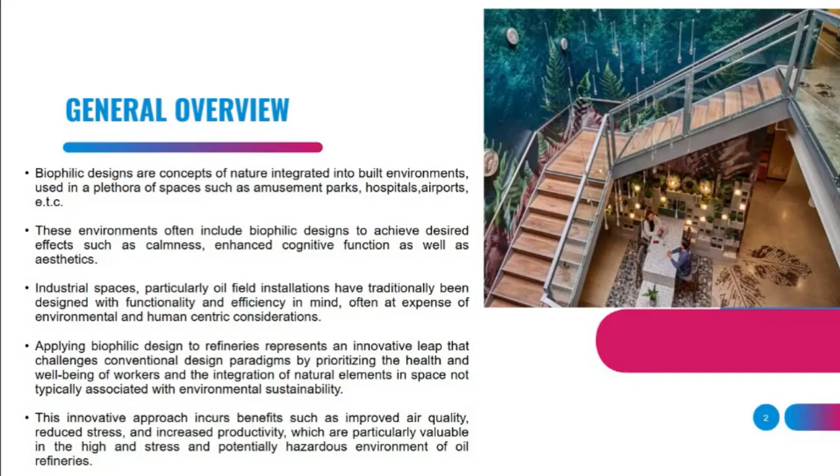So first of all, what are these biophilic designs? Biophilic designs are generally concepts of nature integrated into built environments, and they are used in spaces such as hospitals, schools, airports, homes, and hotels. These environments that include biophilic designs are used to achieve a desired effect, aside from creating or enhancing the aesthetics of the environment. They also bring effects such as enhanced cognitive functions, calmness, and reduced fatigue.

So incorporating these designs in industrial spaces is actually uncommon, and we want to fill that gap because we believe that applying biophilic designs into these spaces helps workers who are usually faced with repetitive and strenuous tasks to experience calming effects and enhanced cognitive functions, which is necessary in their work, and also helps the environment in a sustainable manner. Incorporating this into refineries, we are challenging traditional design paradigms by putting the health of these workers at the front line. This innovative approach helps us improve air quality and increase productivity by enhancing their cognitive functions, and it's particularly valuable in potentially hazardous environments such as oil field installations.

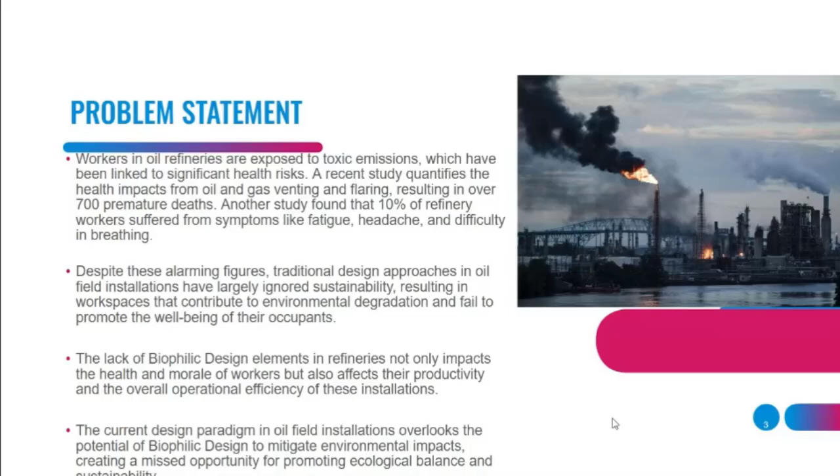We could incorporate biophilic designs, which is a way of bringing organic architecture into the oil patch, increasing the health and morale of workers so they see a reason to come to work happy, not just for the salary. This design will also help mitigate environmental impacts and create a good ecological balance and sustainability effect. Then for our objectives...

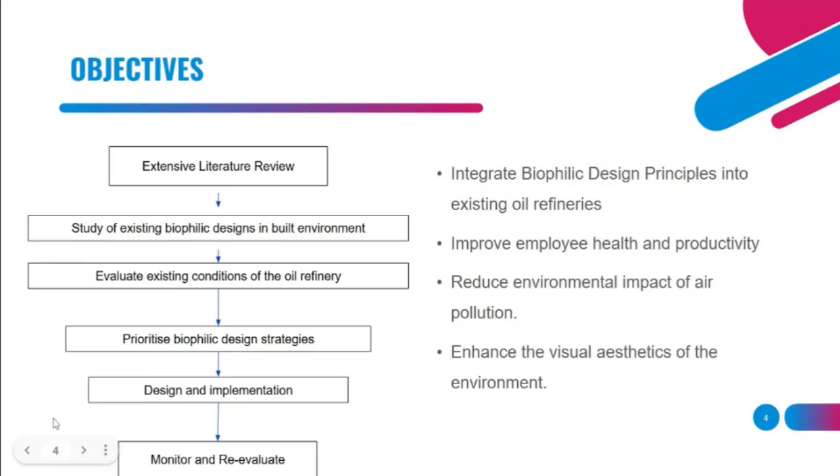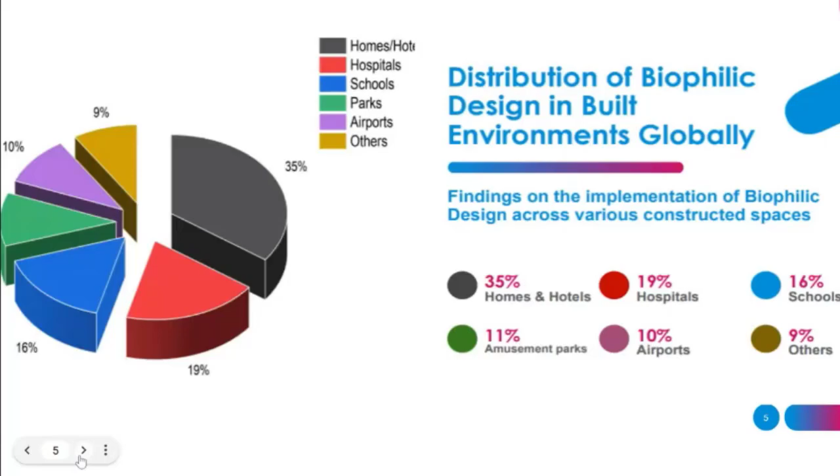According to the research we've done, we've seen that biophilic designs are built mostly into homes, hotels, hospitals, schools, amusement parks, airports, and offices, but they haven't actually been implemented in facilities like industrial facilities. This is the gap we hope to fill. You can see the pie charts showing an uneven distribution of the integration of biophilic designs into these already built spaces. So my partner is going to take us through this integration and why we are going to integrate this into oil field installations. Naya?

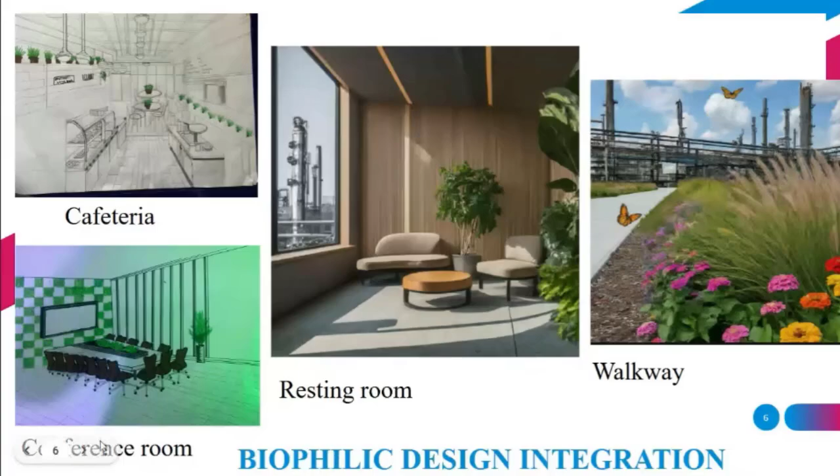So I'll take it from there, and we have the key beneficiary of this research, which are the employees, by helping them in their health and enhancing their cognitive functions. Also, this will be enhancing the environment.

Companies who want to maintain their environmental reputation wouldn't want to be seen as people that destroy the ecosystems. So this also will be beneficial to them and also to the community in that environment, by making them inclusive, to bring the indigenous plants to help us enhance the greenery of both the indoor and the outdoor spaces.

Our relevant sustainable development goals—our research resonates with 4 major SDGs, which are sustainable development goals 3, 11, 13, and 15. Number 3 is talking on good health and well-being, which are very crucial to the workers working there. It also enhances sustainable cities and communities, encourages climate action, and encourages life, which also encourages biodiversity.

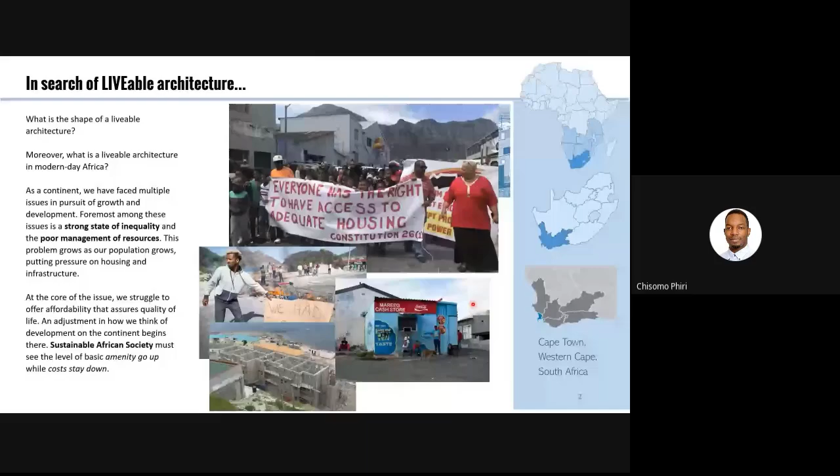And whilst this is a deep problem that's got deep-rooted effects, I believe there is also an opportunity for a new direction, especially when we talk about sustainable African societies, and South Africa as part of that sustainable African society. The idea is simply to find ways of implementing these sustainable systems to increase basic amenities whilst keeping costs low. As you can see, the area of Hangberg, the area of Hout Bay in general, is an extremely diverse area.

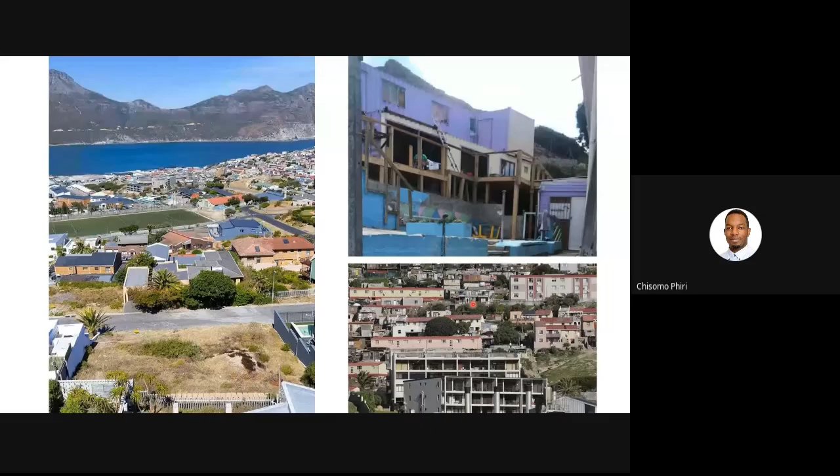There is a huge disparity between the areas that are low income and areas that are affluent, as you can see in this image of Seaview and Hangberg, which are neighboring districts. The issues endemic with inequality revolve around differences in engagement levels, difference in inclusion. There's a level of difficulty in accessing health and security. Integration is extremely difficult if you are starting off in different areas and at different levels of accessibility, and there is a lower willingness to invest in an area that has these issues.

We need to look at a shift from a shallow ecology, where man is above the environment and there is a reliance on technical solutions and the management of the environment as an administrative task. Instead, we need to look at a deep ecology, where man is part of the environment and has veneration for life, all life, and attempts to achieve a complete symbiosis.

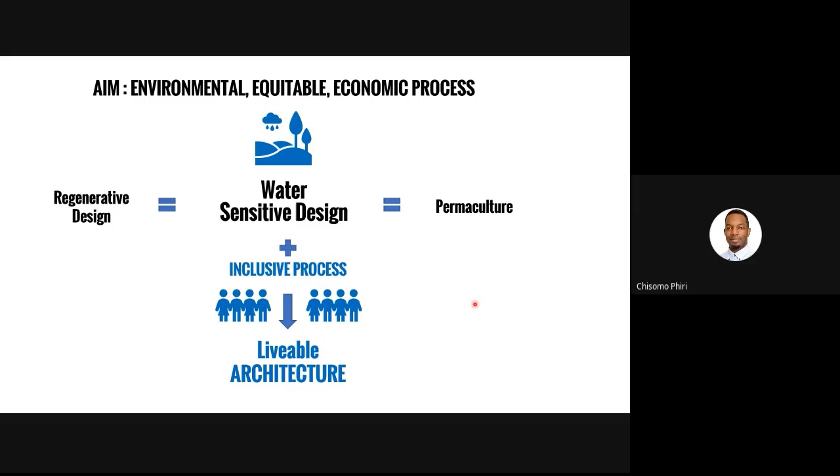With that aim in mind, toward an environmental, equitable economic process, I managed to identify water-sensitive design as part of permaculture, part of regenerative design, but with the addition of inclusive processes we can achieve a more livable architecture, a livable approach to architecture. This is a diagram where I look theoretically at how livable architecture would sit within this framework.

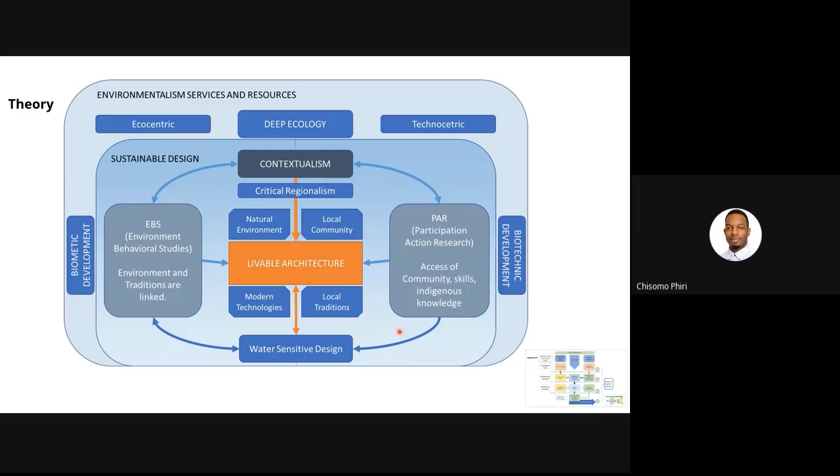Fantastic. As you can see, this is a diagram where I look at the theory involved in identifying where livable architecture sits. It is an aspect of sustainable design, something I imagine is easily connected to water-sensitive design, environmental behavioral studies, and participation action research. But it sits at the junction of all of these elements while being critical to the region, and speaking to the natural environment, local community, modern technologies, and local traditions.

The approach I took, the methodology adopted, was to look at four steps towards a livable architecture where water-sensitive design is a key driver. To get to that point, I looked at understanding the performance targets present in media and literature reviews. I looked at investigative tools such as baseline investigations and data gathering, at independent variables, and then dependent variables, which were community engagement and expert engagements.

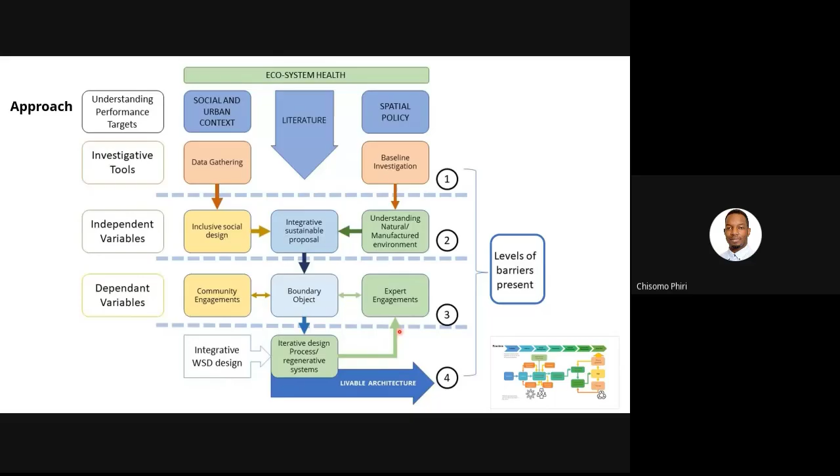That took the form of a redefinition of practice, looking at how you move from initiation to closeout traditionally versus how you can move into initiation, viability, and iterative design development, using community engagement to reframe how to approach design. I also looked at how that could lead to a circular economy, and how you can get into use, reuse, and phasing upward of design.

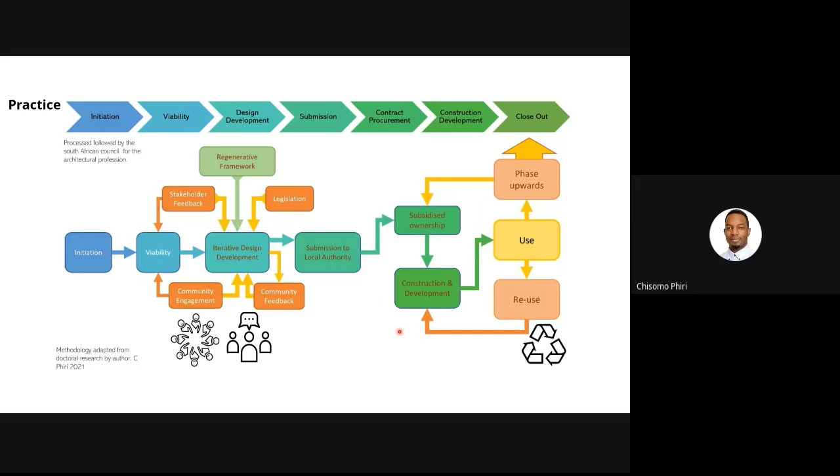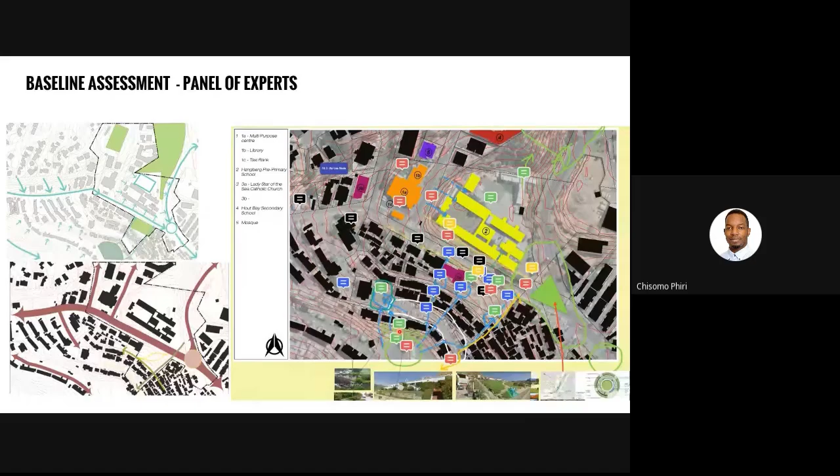I managed to get a panel of experts together, and there was a discussion over the different elements of the area that could benefit from water-sensitive design, as well as identifying areas that were important and areas that could be linked to intervention.

I then engaged with residents and members of the area, not necessarily the whole community. Together we managed to create a revised diagram that looked at all the different levels of engagement with the area, taking this shape, where we looked at layers of information, security, and fire.

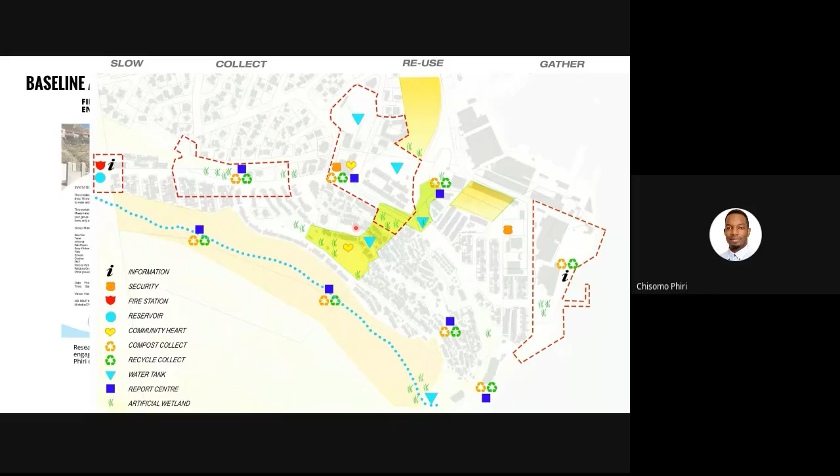We looked at the possibility of implementing fire stations and how that could be received. We looked at opportunities for reservoirs and community, identified where the community would center its activities, and then looked at recycling methods, water retention methods, and possibilities for artificial wetlands in the area.

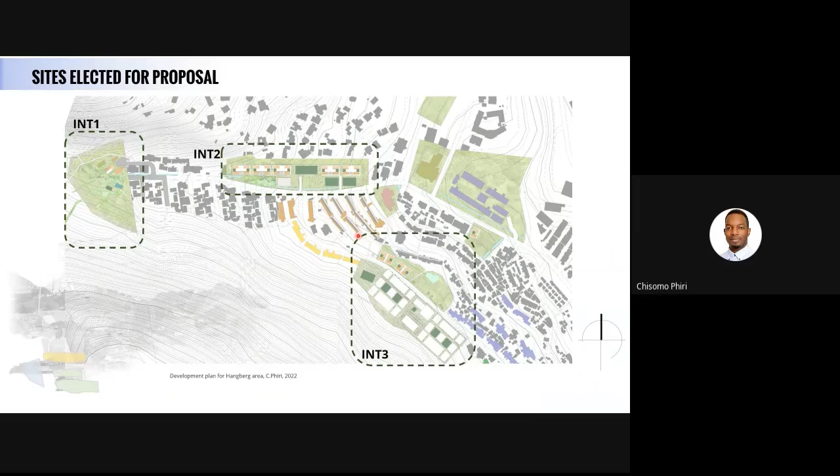That resolved itself into a series of proposals, which I named Intervention 1, 2, and 3. Intervention 1 is a complex system that connects to the environment as a threshold intervention.

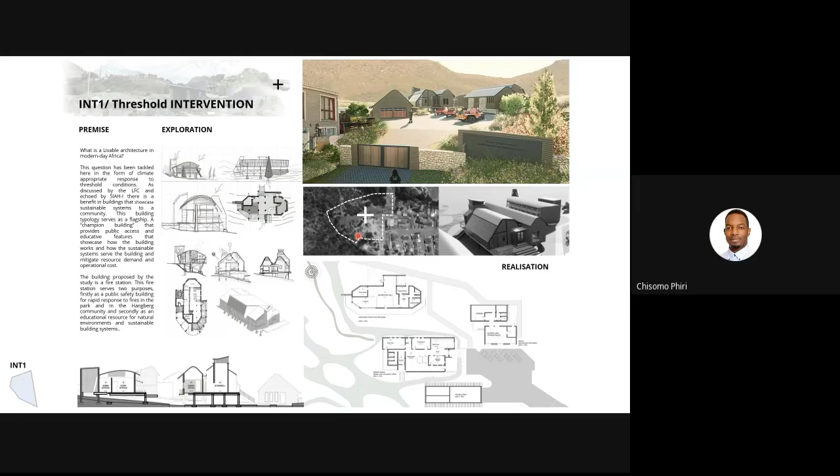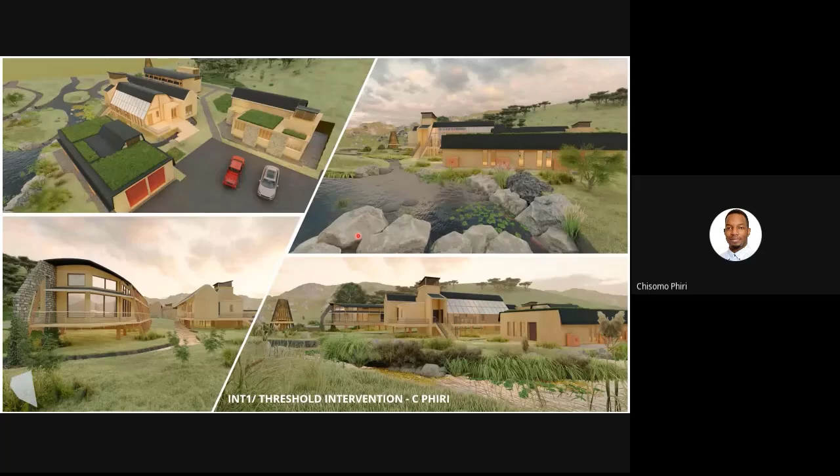This threshold intervention has an information center, a satellite fire station, and systems that work with a dormitory to allow for training as well. This was designed as a building that would touch lightly on the environment and integrate sustainable systems and sustainable materials, so you can consider this a flagship for the project. I'd imagine this as something rolled out as phase one.

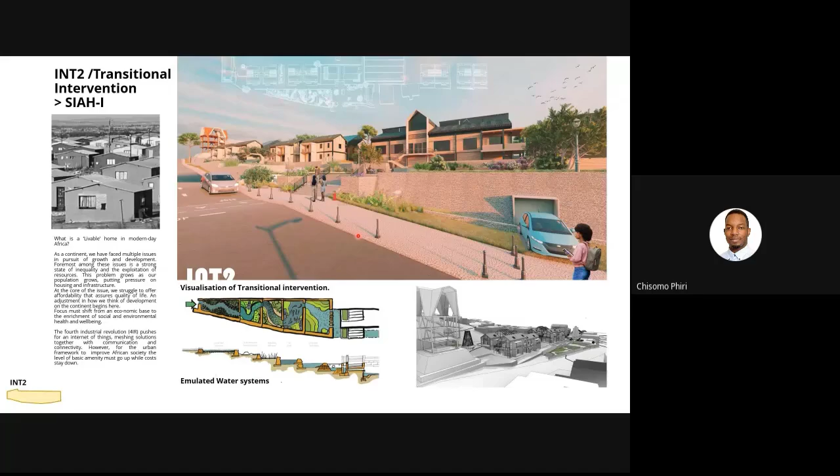And then we would move into phase 2, where there would be transitional interventions, allowing for people to move into these buildings that would be phased up. These are called the SIAH-I livable units. Those units, identified in yellow here in this diagram, would have a series of levels that can be integrated and can be developed depending on the use of the family that's involved.

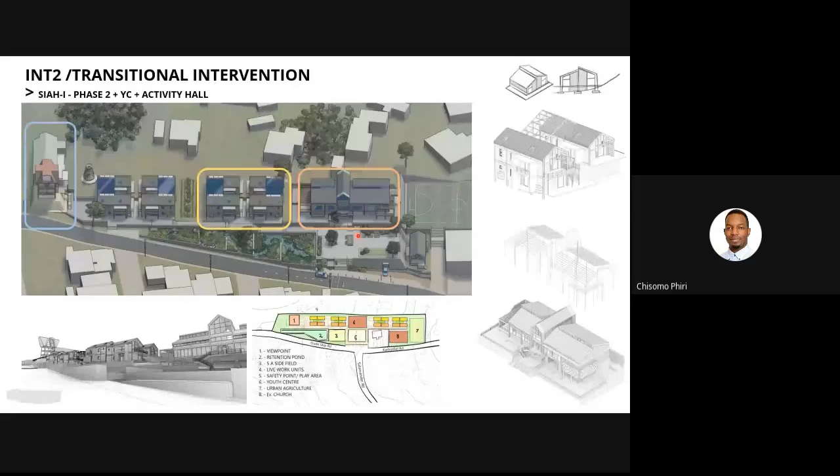This district was also allowed for an activity hall and a youth center. These were programs that were identified by the community as things that they needed, things that they would imagine would benefit the area, as well as a police station with an observation tower that also acted as a green agricultural intervention. And the SIAH-I livable units have 3 phases, as you can see here.

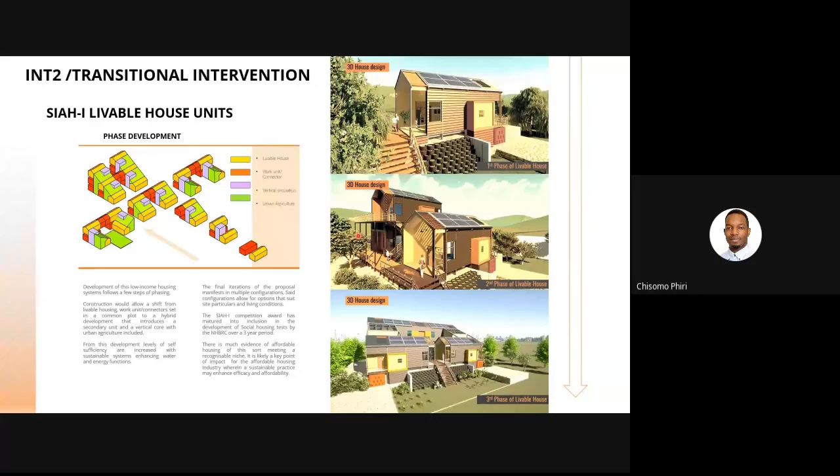These are the systems that were in use, where we quantified the amount of water retention as well as the water administration, how much savings could be calculated in one unit, and then how that could be carried forward.

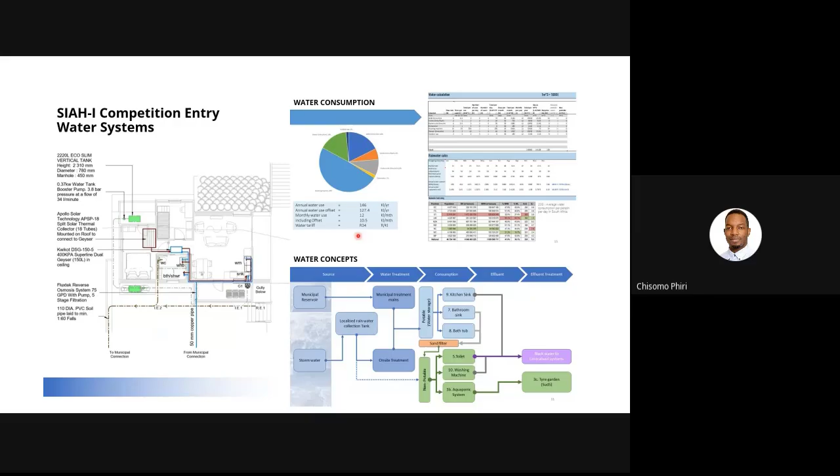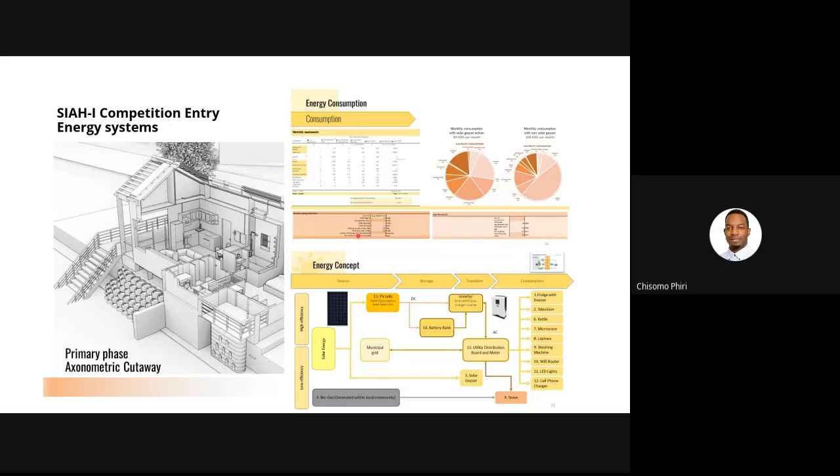The same was done for energy, where savings were identified in terms of using a solar geyser as opposed to not using one, using a centralized system so that you don't have to rely on the power systems that are present. And then, of course, there was identifying public buildings as sources of energy for the entire district.

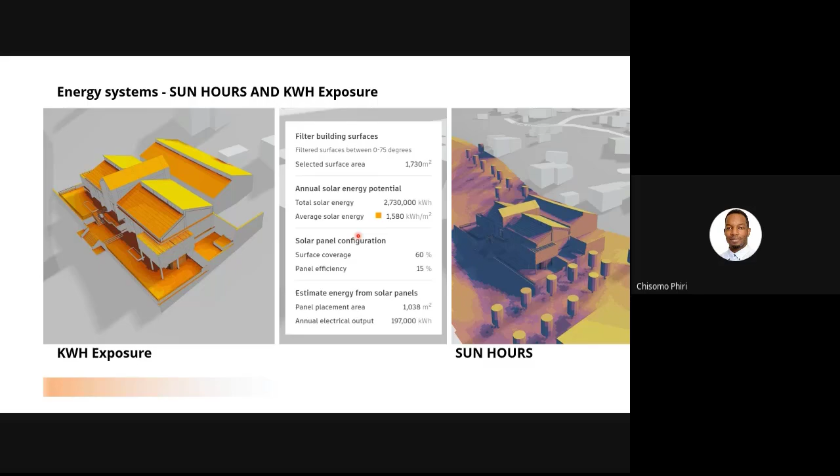This is an analysis of the sun hours and the kilowatt hours of exposure present on the youth center building, which would then start to act as a power generator for that area. And then that got taken to the next level, which is intervention 3.

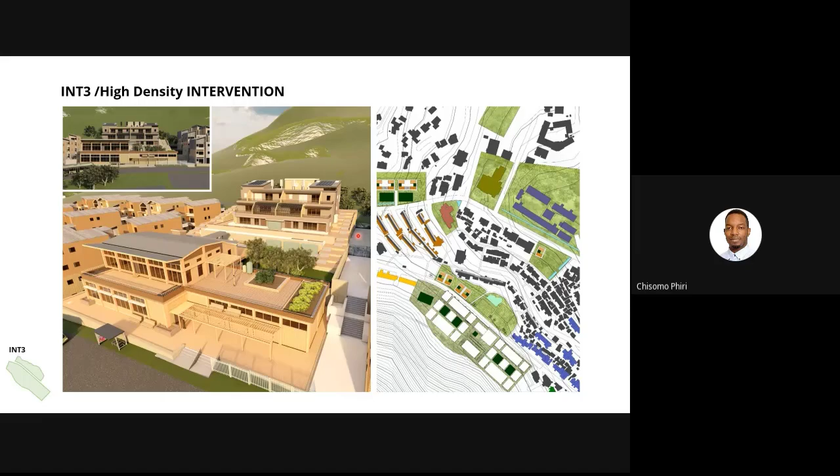In intervention 3, we looked at maximizing the area and developing high densities, trying to ensure that the highest amount of people could benefit from generation and water treatment. These are diagrams that describe how that would be achieved in the mixed-use central system, which is this building over here. And you can see it here in section.

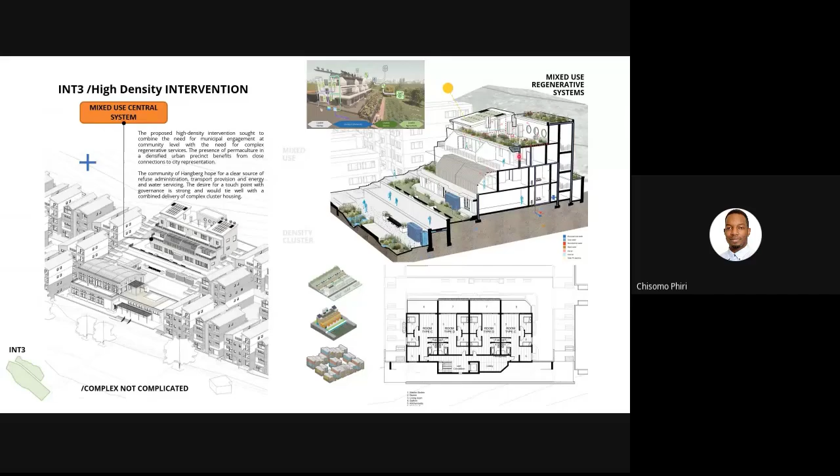That was then communicated into the community hall, which was more focused on how we can use technologies creatively, using low-embodied carbon materials like timber, low-intensity brick, as well as passive heating and passive cooling, and decentralized water treatment, which would be situated in a centralized water system there.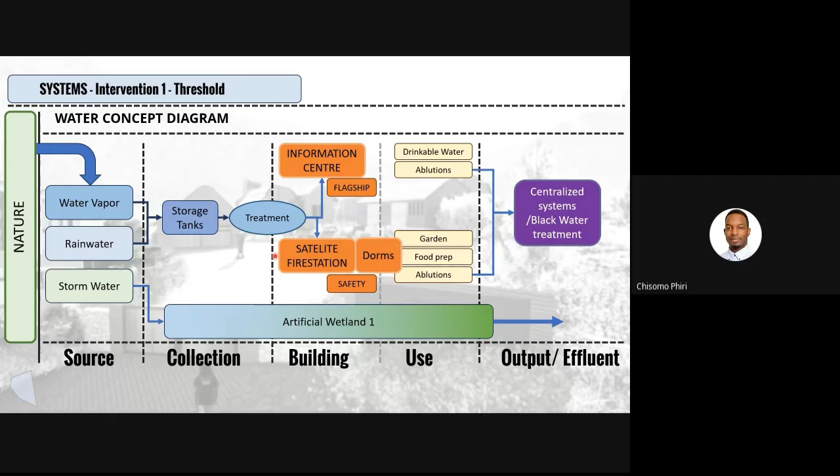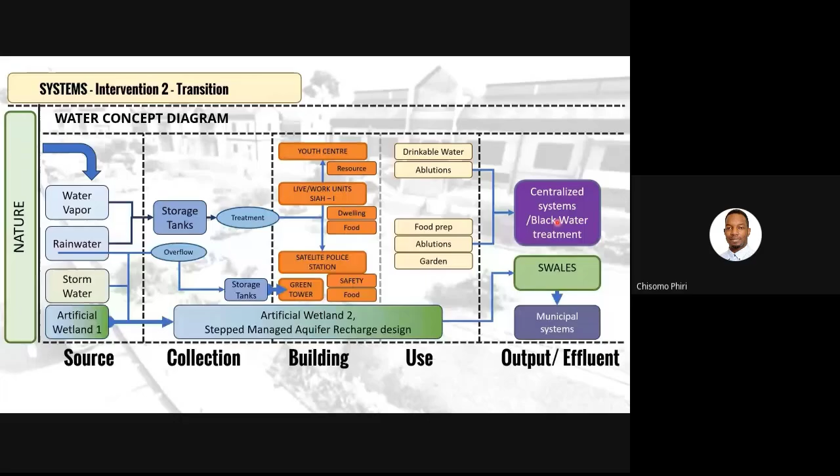Then, of course, I've got water concept diagrams that talk about how these intervention systems would work cohesively from source, collection, building utilization, and then output effluent. These systems would connect to one another and would then eventually find their way back into the natural environment after being treated and naturally run through a series of systems of aquifers and swales.

And this is how all of that comes together.

In conclusion, these became the key findings: there are 2 sets of barriers in the way of implementation of water-sensitive design in low-income areas. The first set of barriers was established systems, of course, the convention. We rely on established systems.

Financial barriers are present. Not many people understand how to financially motivate such a program. There are social precepts of this system being expensive, being impractical, because of the amount of change and innovation that would have to take place. And of course, there's technical operation barriers and existing policy that seem to be in the way.

However, that perception is the core of barrier set number 2, which is a perceived cost of construction, perceived cost of conversion, and a perceived difficulty in adoption, when in truth, once implemented, these systems could then start to feed into a rolling forward of improvisation and innovation.

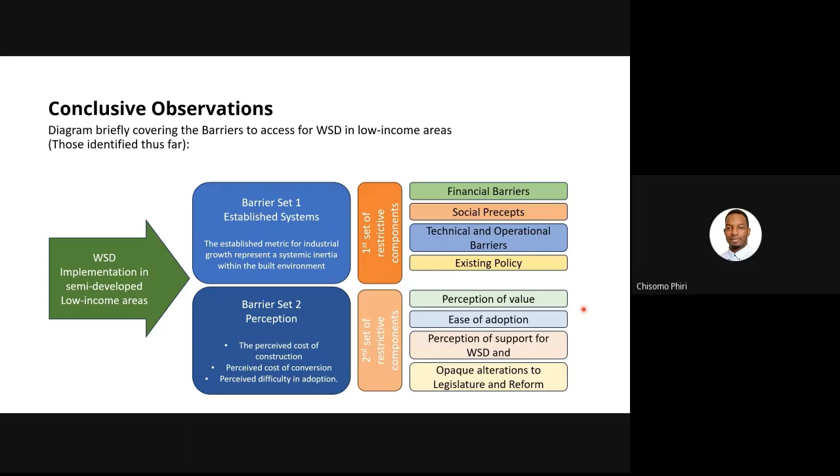So in totality, the research found that there are some barriers present, and for us to get to a water-sensitive, livable environment, we would need to overcome these barriers and find a way to engage in sustainable practices whilst addressing these issues for people to buy in and accept the changes. Thank you.

Great. Amazing presentation, Chisomo. Well done. Well done. Well done. This is an amazing solution that could benefit our environment, and is hitching on the United Nations Sustainable Development Goals, which is critical to us, right, as World Technology Partner. That beautiful presentation right there.

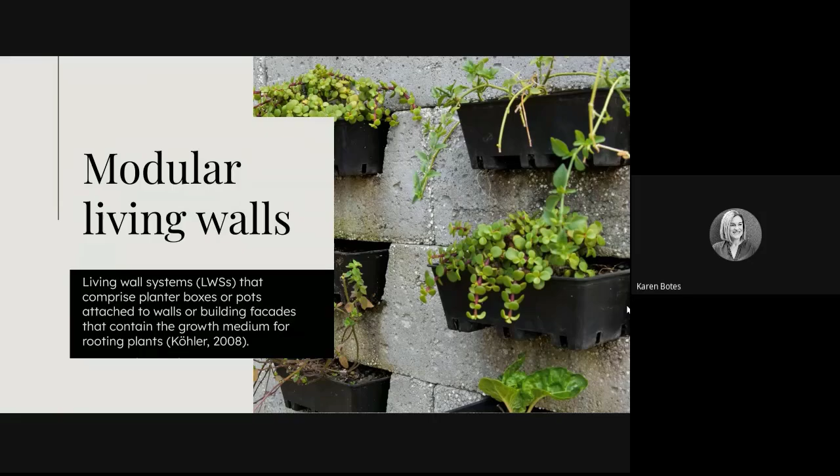First I need to clarify two definitions. The first is modular living wall systems - these are living wall systems that comprise planter boxes or pots attached to walls or building facades that contain the growth medium for rooting plants. And African vegetables are green leafy vegetables that are naturalized and adapted to Africa or selected for their local conditions.

So the SDGs I looked into was food security mainly, but we cannot look at food security in isolation, so climate action impacts on food security. Over the last 2 decades, the global climate has changed in such a way that it's affected all of our lives. Climate change impacts the prospects of achieving all 17 of the SDGs, either directly or indirectly, and especially food security. There's a link between food security and no poverty, and also responsible consumption and production, proved by research. I also explored good health and well-being, gender equality, decent work and economic growth, sustainable cities and communities, and life on land, to have a two-way link between ending hunger and reducing food insecurity.

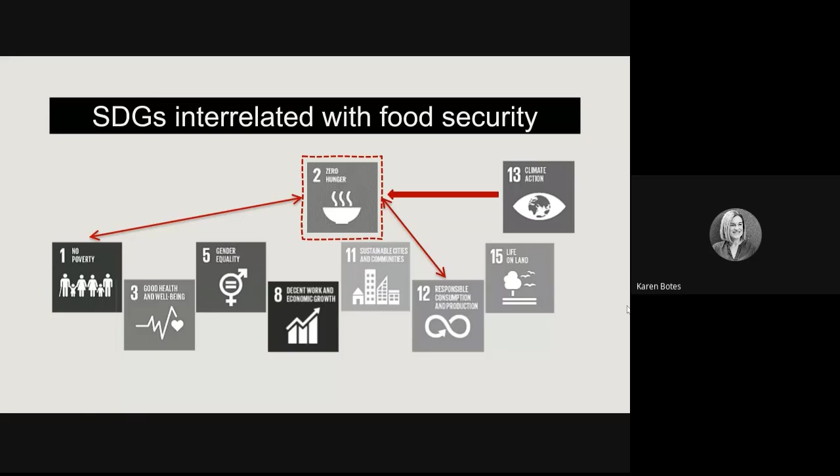Due to increasing atmospheric carbon dioxide levels over the last years, we experience extreme climate events with substantial economic losses for most global economies, and the changing climate conditions impact food supply and productivity. Especially in Africa, climate change has a devastating impact on food security, and this contributes to growing food insecurity and poverty.

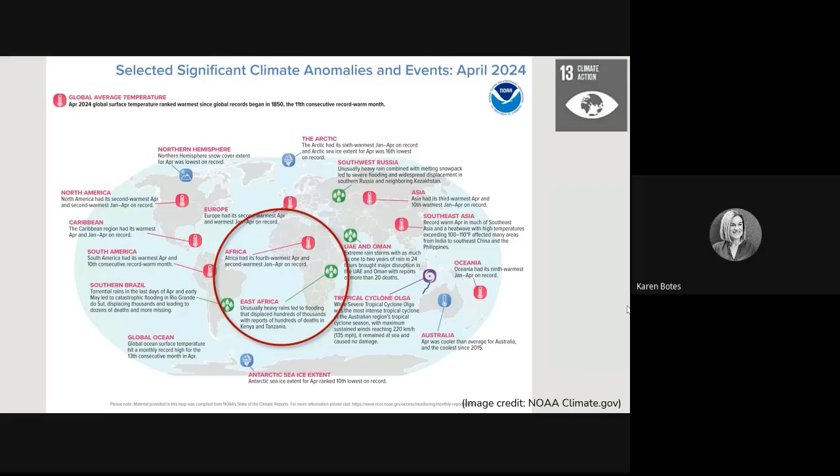Looking at the South African population, there was a 1% increase from 2023, with the population currently standing at 62 million people. The Gauteng province dominates internal migration, with more than 2.4 million international migrants from the SADC region. Approximately 55.5% of the South African population is living in poverty, with a total of 25% experiencing food poverty. These issues intensify food insecurity and the related SDGs.

My research focus areas were, number one, the contribution of urban small-scale food production to household food security and interrelated SDGs; two, the performance of outdoor modular living wall systems as edible green infrastructure; and three, the performance of African vegetable crops in modular living wall systems for household food security.

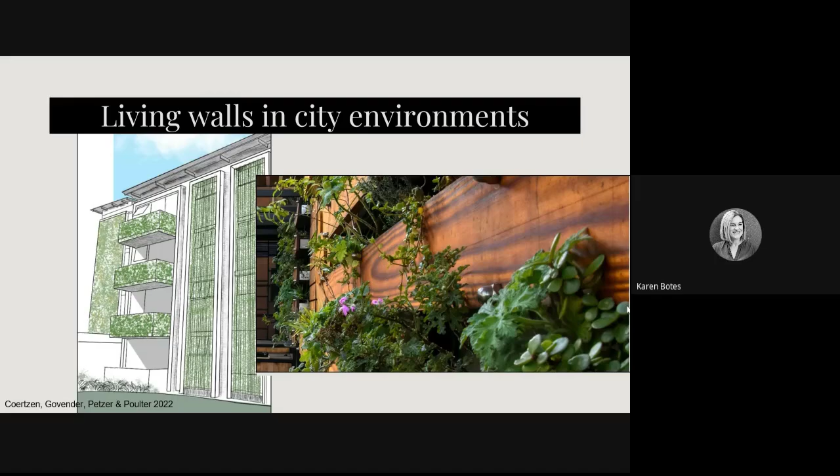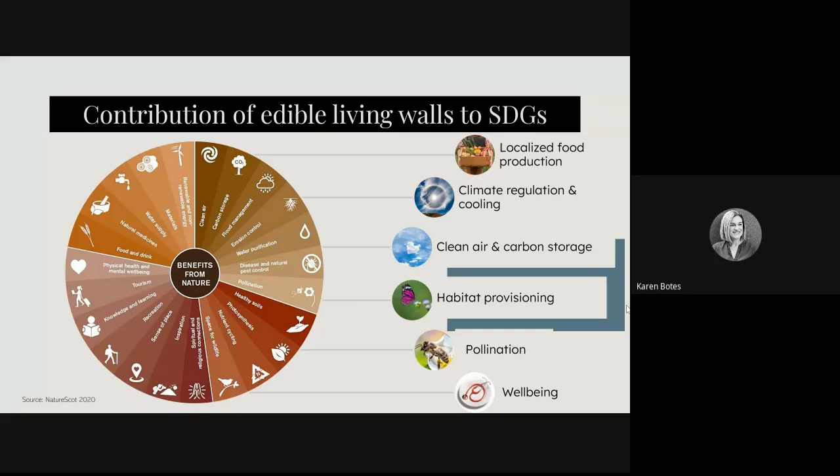Looking at focus area 1, food security and related SDGs: in inner cities, the potential area for facade greenery is almost double the footprint of buildings. That's why I looked at living walls. Living walls offer ecosystem services which are vital to sustainable cities. If we incorporate small-scale food production in living walls, we can address food security, cooling, reduce carbon dioxide, provide habitats, and benefit our health and well-being.

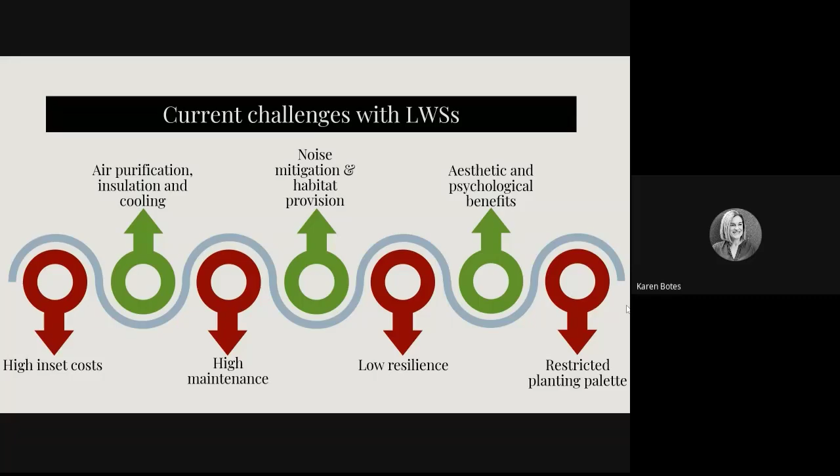Then looking at focus area 2, the living wall performance - current challenges with living walls show high initial costs, and maintenance requirements outweigh their benefits in total. They are not resilient, with a restricted planting palette to survive the stresses of an urban environment. So my study involved the construction of 2 selected systems. The first system, on the left-hand side of your screen, is the vicinity system, and it presents a high technology system.

The second system on the right-hand side, the eco-green wall, is a low technology system. The control was a natural soil area in which the crops were planted in a conventional agricultural convention.

Then area number 3, African vegetables. The global system relies on only 30 crops now for the nutritional requirements of the human population. This makes our food systems very vulnerable to climate variability, especially in developing economies like sub-Saharan Africa. So the human population will be more vulnerable if one of these crop species falters due to climate change.

One of these strategies entail the reinvigoration of African vegetables to improve diets and their sustainable use. Due to time constraints I'm not going to go into all of these, but the study monitored 9 African vegetable crops over a period of 6 months between 2020 and 2021.

I looked at various variables. I compared the biomass and plant stress for the different typologies and the crops. My other variables include minimum and maximum daily temperatures, relative humidity, precipitation, soil temperature, water content, and electrical conductivity. And then I analyzed the data statistically.

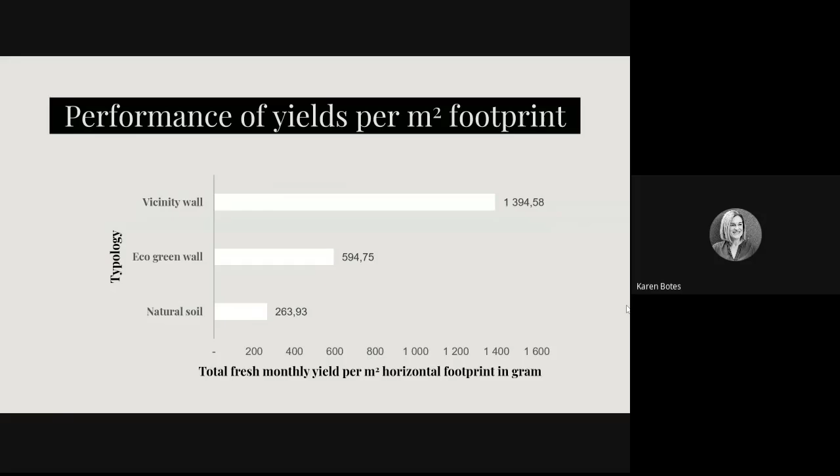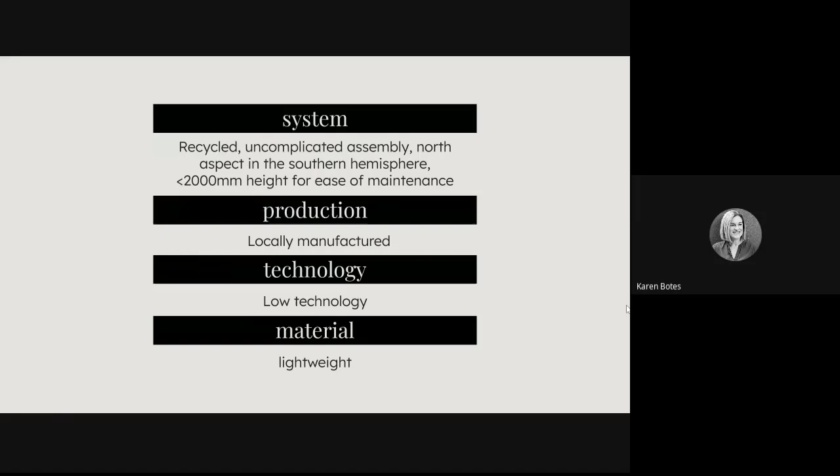Then looking at the performance of living wall systems: the system has to have components manufactured from cost-effective recycled or reused materials. It must preferably be locally manufactured. It must be a low technology system with uncomplicated assembly with robust components, and materials must be lightweight.

Also, the study proposes plant pots with a soil volume of at least 3 liters and a depth of 200 millimeters. This is important because it increases the yield and reduces the plant stress. Selecting suitable crops increases the crop performance, resilience and social benefits. The soil must also be suitable for the crop requirements.

Then a basic drip irrigation system must be provided for each plant level. This contributes to reduced costs and carbon footprint. And lastly, the system design should avoid open reservoirs and filters to reduce maintenance.

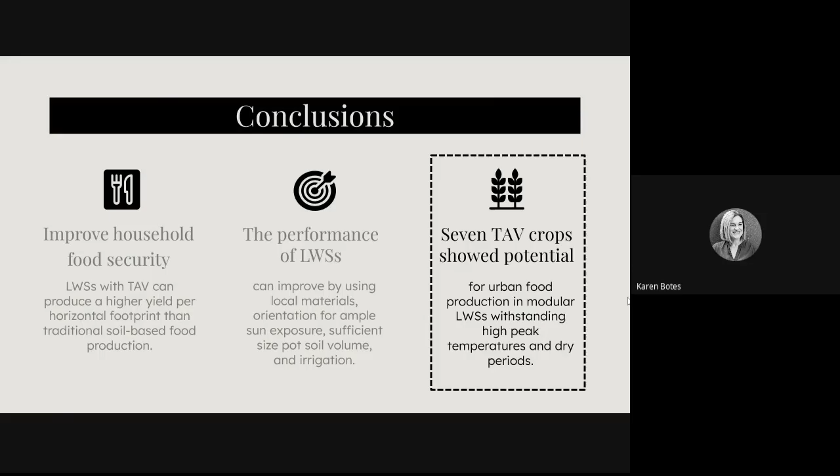Then 7 of the African crops that I looked at showed potential. Due to time constraints, I'm just going to flash through them quickly. Otherwise, I will exceed my 10 minutes.

Thank you very much.

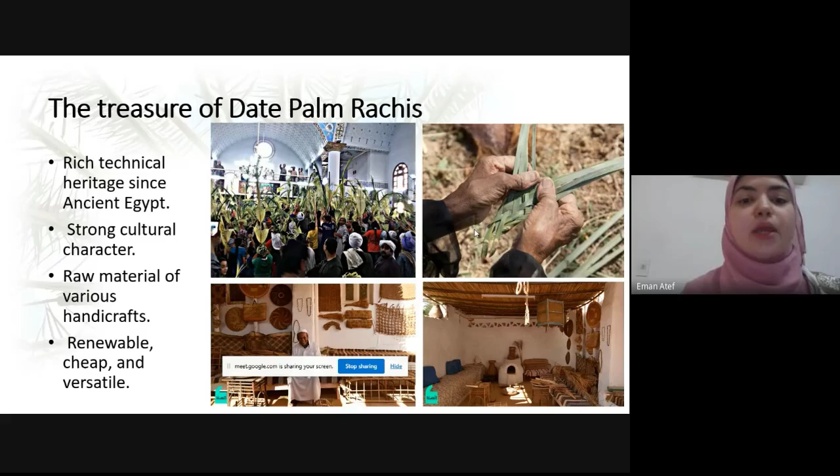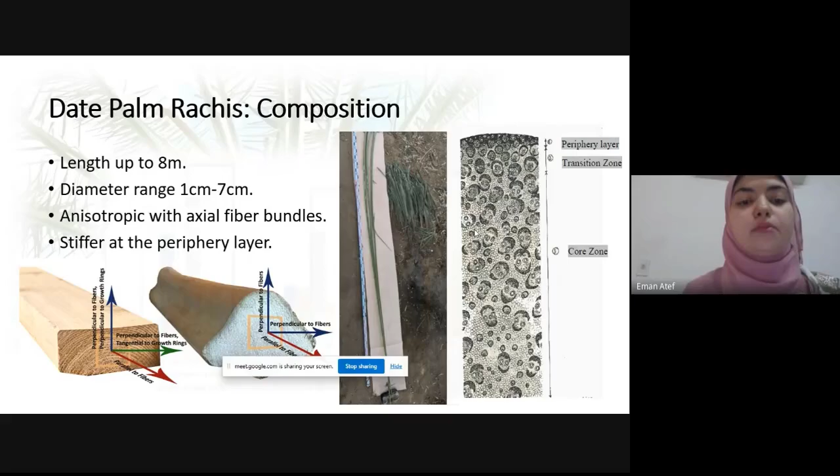Now let's look more closely at rachis. Rachis is the long rib flowing along a palm leaf with a length up to 8 meters and a diameter range from 1 to 7 centimeters. Fiber bundles extend along the rachis without much interlinkage in between, and the bundles are the densest on the outside, which explains why rachis is traditionally used without peeling to preserve its strength. The fibers being the sole medium to channel the forces makes the strength in the longitudinal direction far superior to that in the perpendicular direction. This is the main issue we must consider in any design concept that uses rachis.

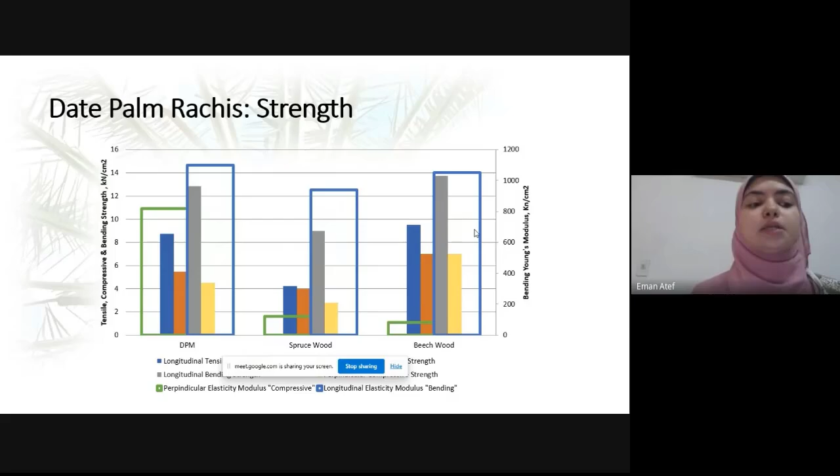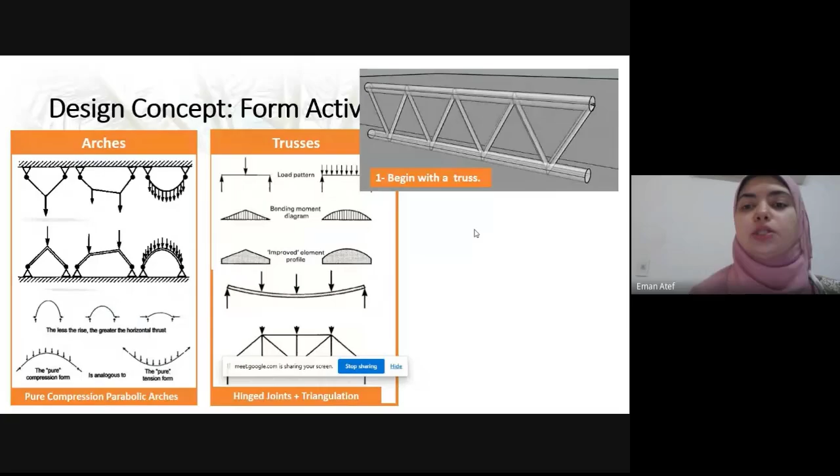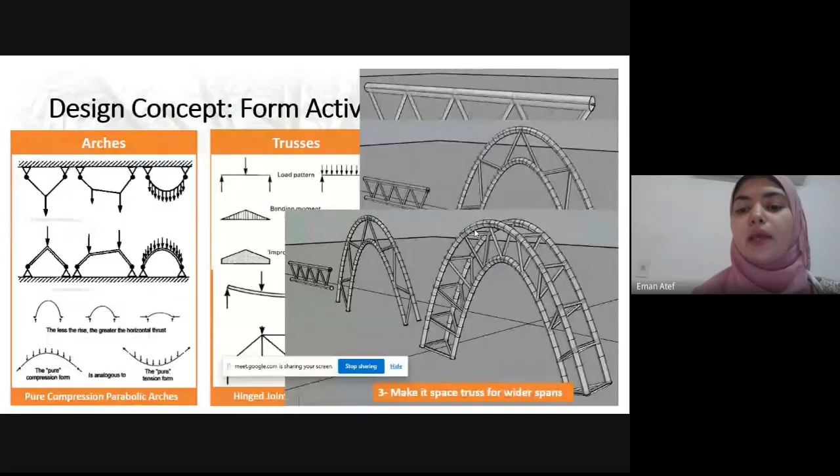So we'll need to look for a structural component that has the ability to transform all moments to axial stresses, so the fibers can carry them efficiently without failure. Such components include trusses, which use hinge joints and bracings to eliminate moments. Moreover, shaping an arch to be parabolic transforms all stresses on it to pure axial compression. So we thought, what if we begin with a truss and then arch it into a parabolic truss, so everything on it is axial compression. Then make it into a space truss to have higher strength and wider spans. Then shorten the bracings at the top for higher stiffness and lengthen the bracings at the base for higher out-of-plane stability. So this was our first concept, the tri-arch space truss.

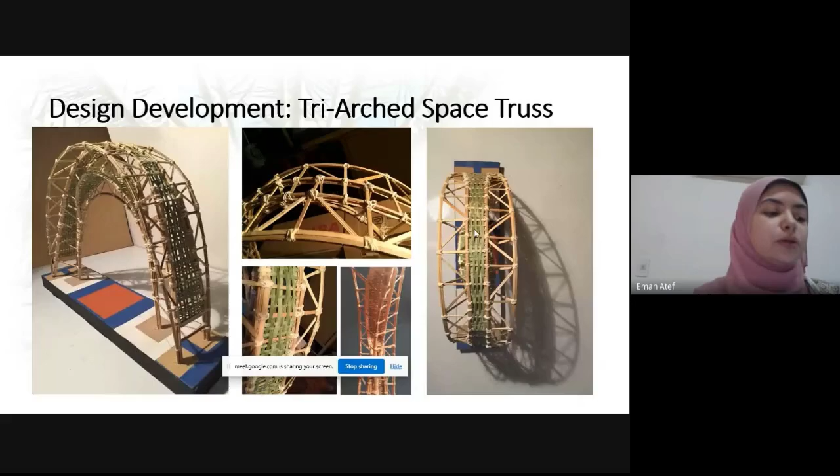This is a maquette we built using date palm rachis cut to scale, so we could understand the scale of the elements to use in bigger laboratory specimens. This was building these specimens, at a scale of 1:3, with a span of 2.8 meters.

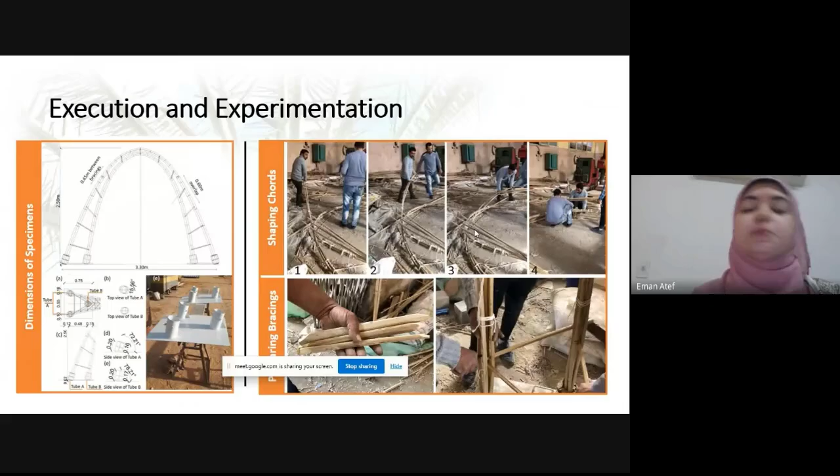The specimens were built by local craftsmen who enriched the design details with their expertise from the traditional handicrafts they deal with every day. These were our three specimens, and each was built in under a day, reusing members from the previous ones, because failures were exclusive to the top parts. So every time, the top parts were simply replaced, and voila, this is the new specimen.

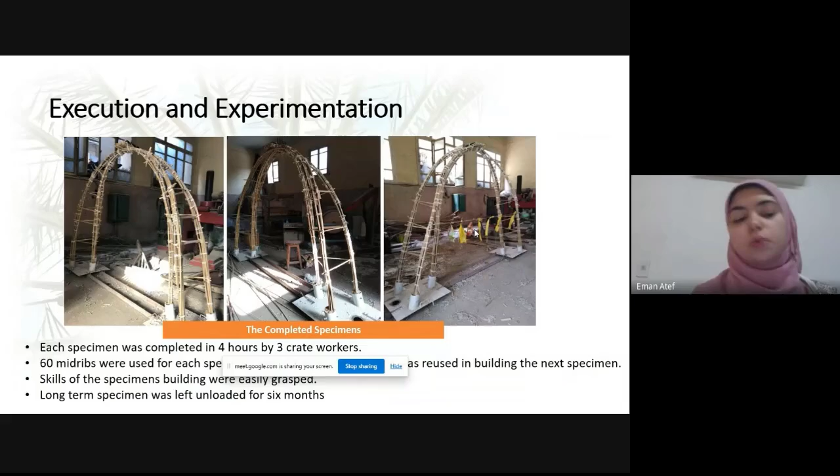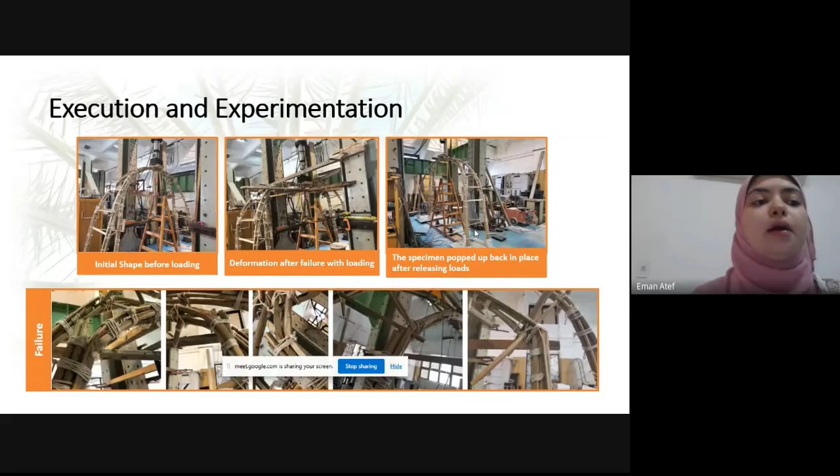In the laboratory, they showed high flexibility and safe failures. Failures were marked when we began to hear tiny cracks in the top parts, and the models popped back up after releasing the loads. The experimental behavior was compared and used to validate the digital finite element method model, and this was then used to predict the performance at a span of 12 meters, proving to be safe.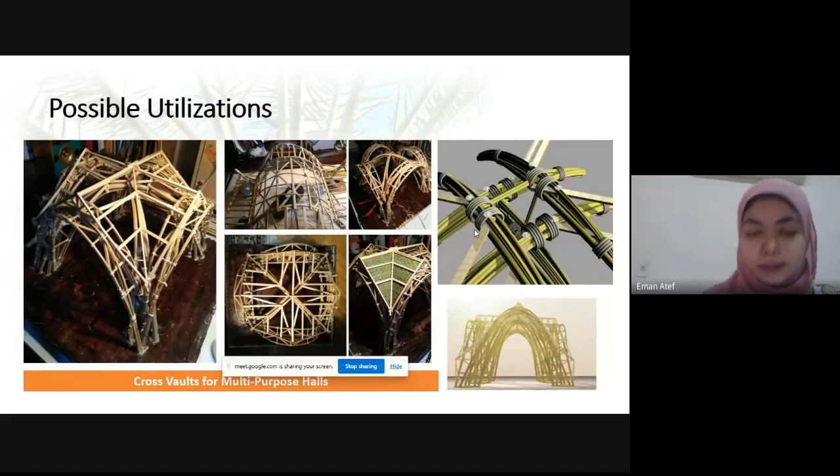This was my PhD, actually, but I found problems implementing them to build at the one-to-one scale, because they're monolithic structures that must be built one-to-one to actually investigate their performance. So we said, why not shift to a smaller assembled unit, something that employs the concept of prefabrication? And actually, prefabrication is not too far off from traditional practice.

Traditional handmade furniture, like those on the left, or the fences and huts in the middle and right, are traditional fences made in Upper Egypt and the oases of Upper Egypt, and they are all made by assembling separate lattices. Each lattice is made separately, and then they are assembled to make the whole product.

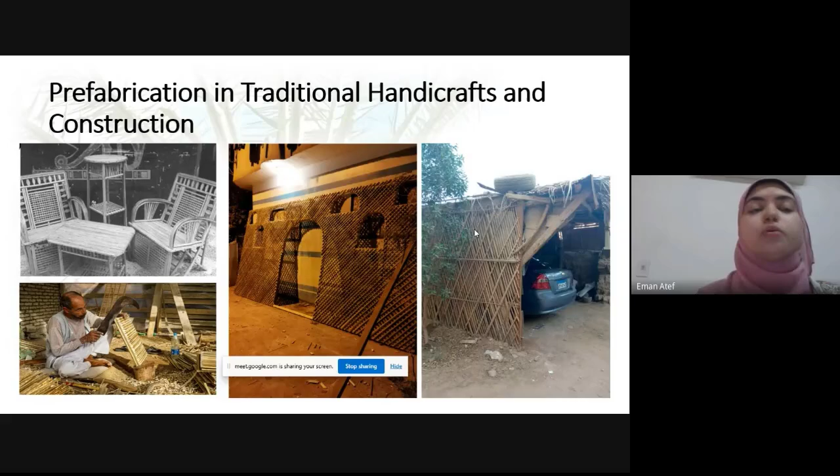So currently, I thought about using the details of the traditional handicrafts and employing them in a new design, a prefabricated wall panel that can be made, moved, and assembled to make a shelter or a house or whatever. So the details of the wall were inspired by details from traditional furniture. And as we said previously, rachis is...

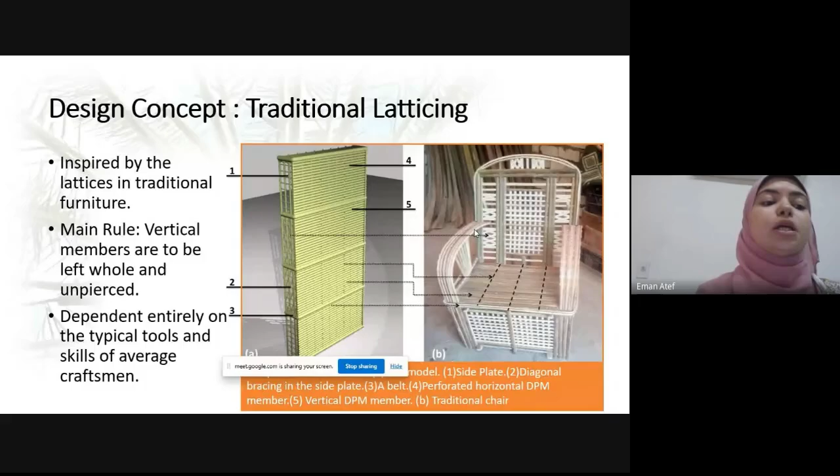...panel to carry these loads. So the longitudinal, vertical members must be left intact without any piercings, without any damage to the fibrous structure. But they can be driven through piercings in the secondary horizontal members, as we see here.

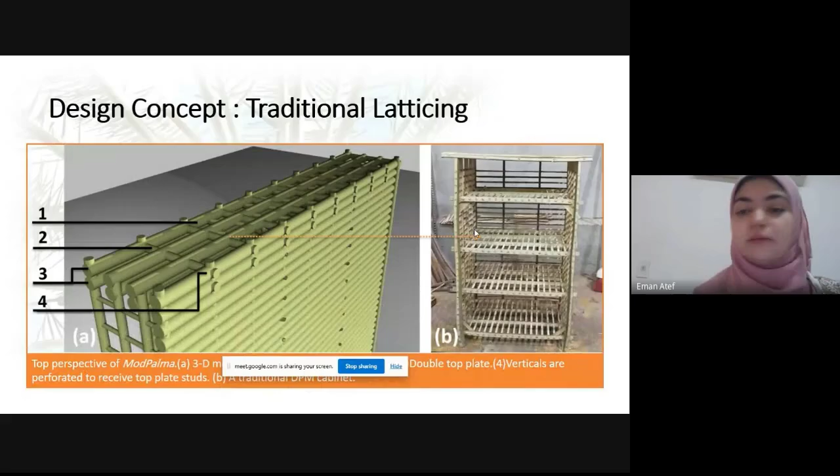And at the top of the panel, the top plate was duplicated to distribute the loads more evenly, also inspired by a shoe rack made of palm branches, shown on the right. At the core of the panel, additional vertical and horizontal frames and diagonal bracings were added to enhance stability and shear resistance, a detail inspired by beds made of date palm branches.

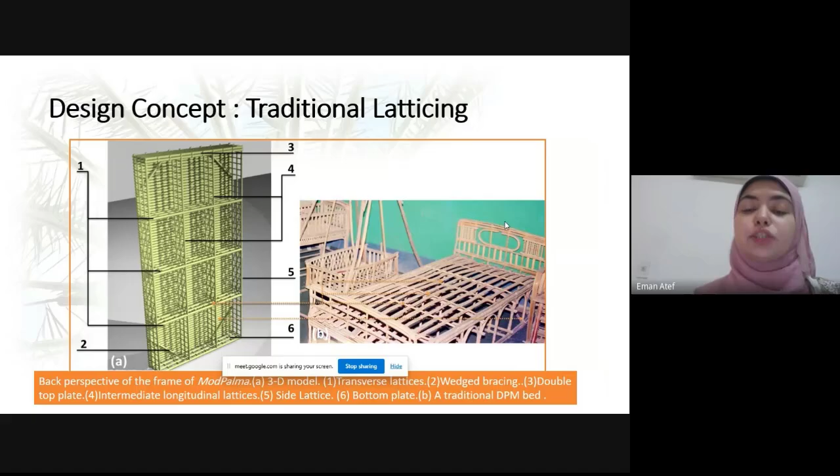Even the illiterate craftsman, through his nature, understood how he must fight the shear and create shear resistance, and this is what we learned from him.

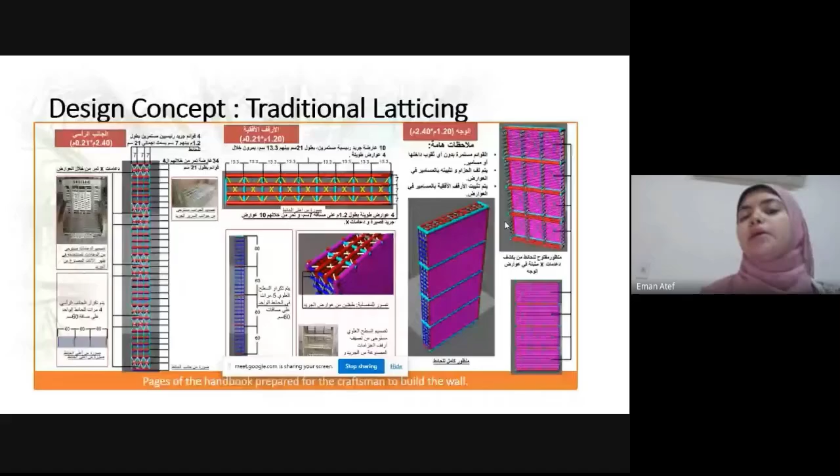And this was a detailed handbook I made to guide the craftsman through building the panels, written in Arabic, of course, by linking the details to the daily work they deal with in traditional furniture, fences, or other traditional crafts. These are details of the first real-scale panel.

Which shows the interlinkage between the outer faces and the internal frames.

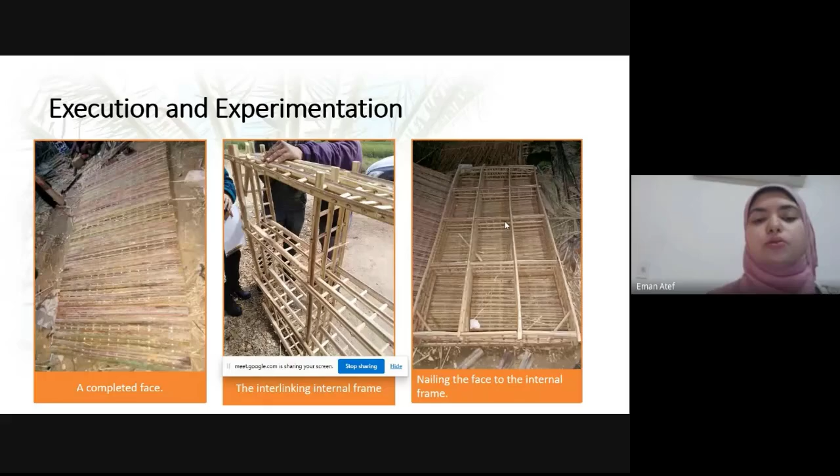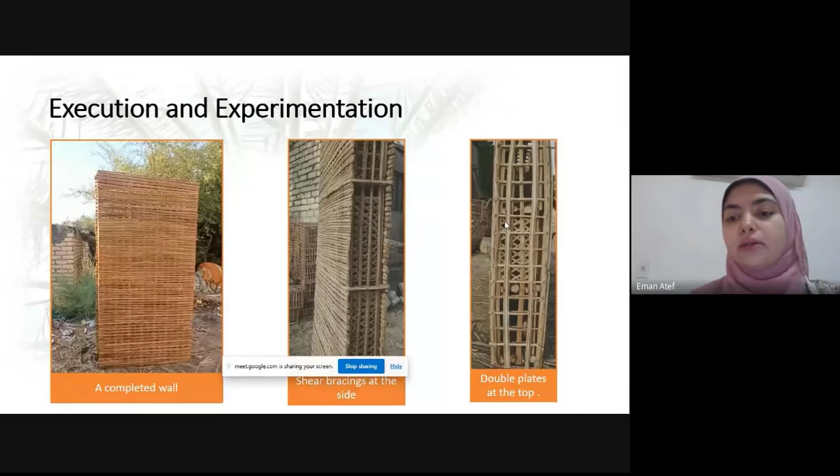These are photos of the completed walls from all sides. The artistic skills of our craftsmen can obviously shine through, as we see here in the middle and the top of the wall.

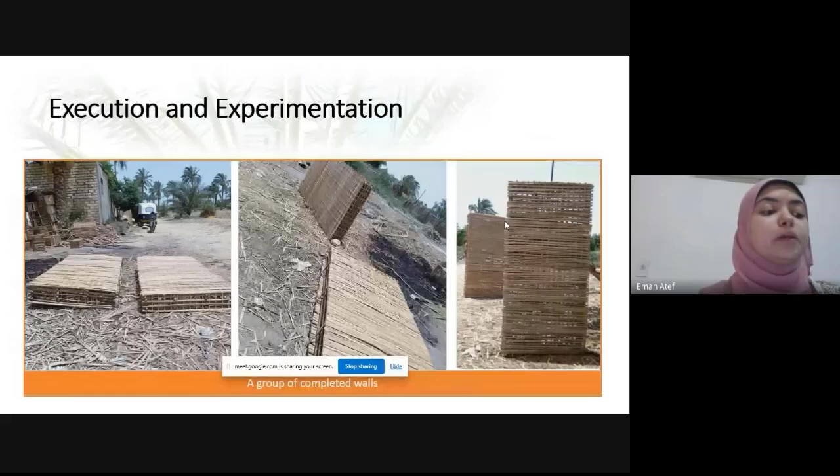We can see here that the walls show sufficient stability and rigidity, and the craftsmen we hired to build them admired the easy, straightforward, and fast execution process. Using the validated properties, a finite element method model was simulated for the wall, and it showed promising performance as both a wall panel and a roofing panel.

So at the end of this presentation, it's worth noting that this methodology of form-active structural conceptualization can be replicated for any other long fibrous agricultural waste, such as reeds, thin branches, giant reeds, or bamboo, with proper adjustments to the natural physical properties of each type. Also, I'd like to say that this research emerges as a response to Sustainable Development Goals.

These goals include empowering rural communities for sustainable construction that harmonizes with the delicate nature of their environments. It also introduces a new versatile field to reuse date palm rachis safely. This safer method saves the environment from hazardous pollutants and greenhouse gases produced from annual burning, because most pruning procedures of date palm end up being burned—only 10% are used in traditional furniture, the rest is burnt to clear fields fast so they can be used for other things. So this is actually a better way of using them as waste.

Also, these trials aim to help substitute wood to fight irresponsible sourcing of extremely scarce wood forests, because in Egypt we don't have a lot of forests, and all our wood is scarce, and sourcing it is dangerous to the environment. I believe this can also be said for the sub-Saharan region in Africa.

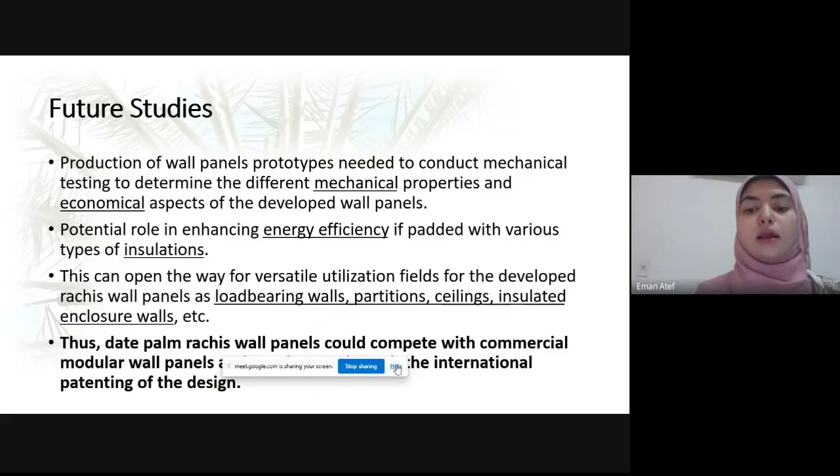Finally, I'd like to acknowledge the interdisciplinary guidance of my professors from Ain Shams University: Professor Yasser Mansour, Department of Architecture; Professor Hamid Al-Mosli, Department of Mechanical Production Design; Professor Zamra Abdurrahman; and Ayman Mustafa from the Department of Structural Engineering. That's it. I hope we can get in touch and collaborate soon. Thank you.